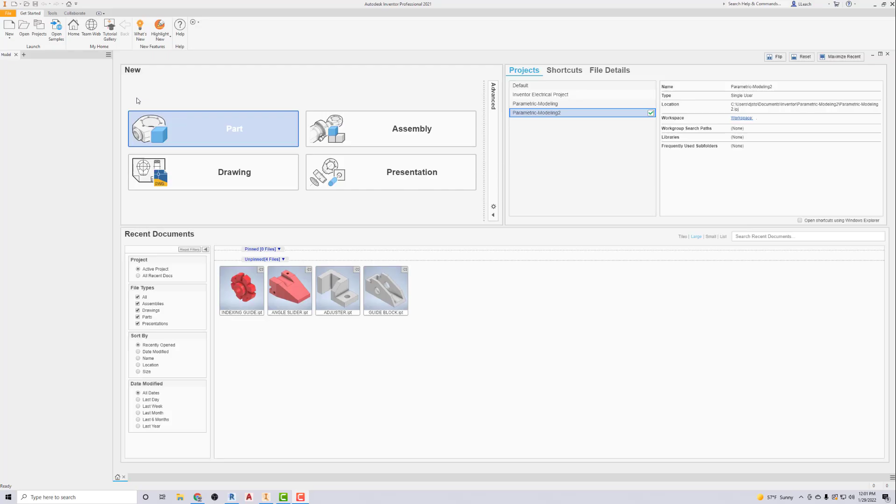Dimensions are in inches, so I'm going to go to new, English standard inches, and then go to create. I'm going to go to start 2D sketch, and click this XY plane.

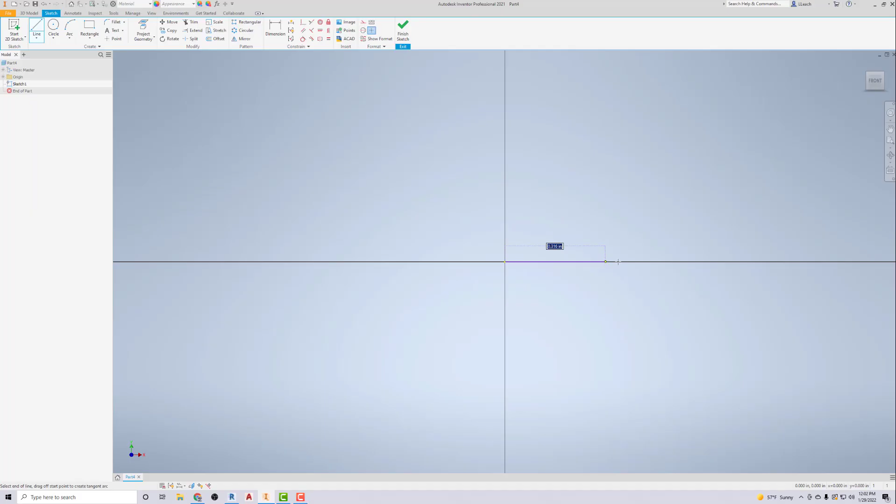So what I'm going to do is create this L shape, kind of the front view of it is a big L shape. I'm going to start here and just kind of draw a random L shape. I'm not worried about the dimensions.

Go up a little bit, make sure it's straight. Go over, straight down. Okay, so now I'm going to dimension it.

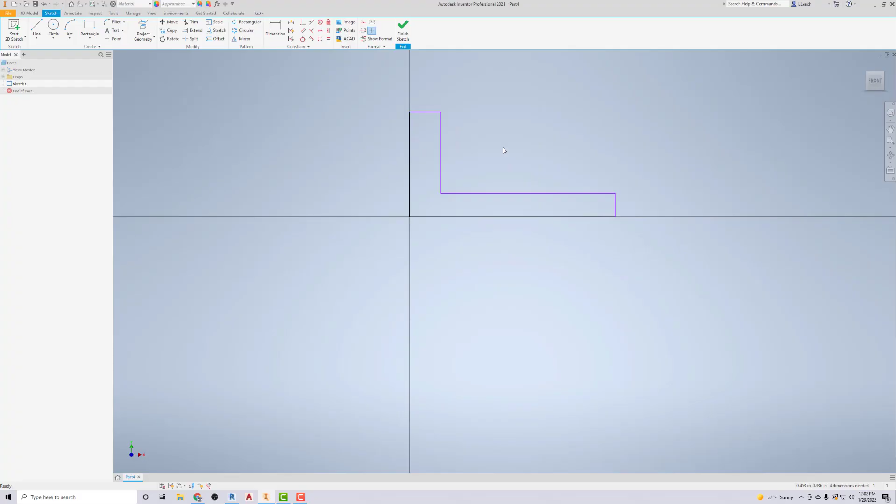This bottom leg here is 4.5. It's gonna stretch me way out. There it goes. So there's that, and then this thing is 2.5 here. And it went kind of wild and crazy.

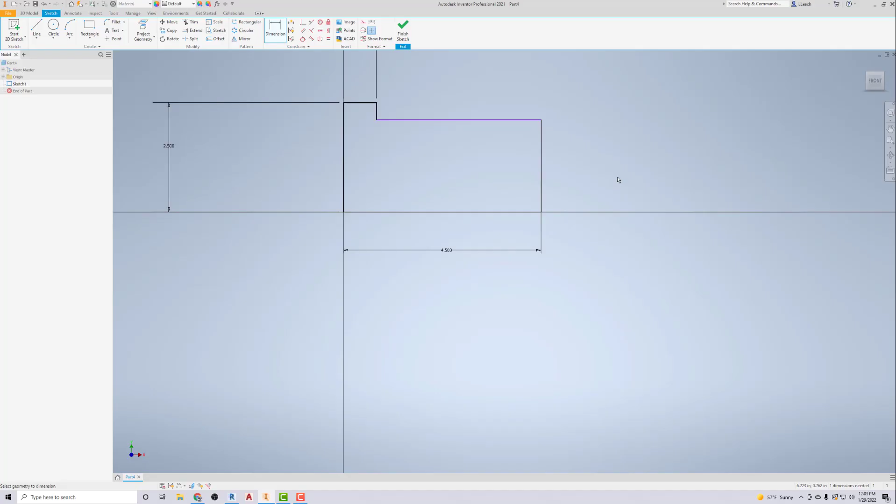All right, so then let's see, this is 0.75. That's 0.75. And then from here to here is 0.75. All right, so there's our L shape.

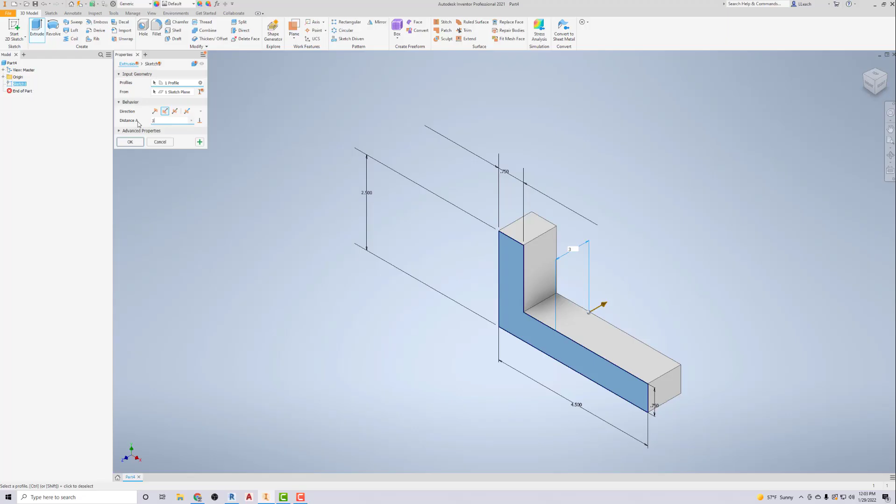I'm gonna finish the sketch. Hit the home button here to get it all in my view. I'm gonna extrude, go back and flip that bad boy. And that's gonna be 3. Hit OK.

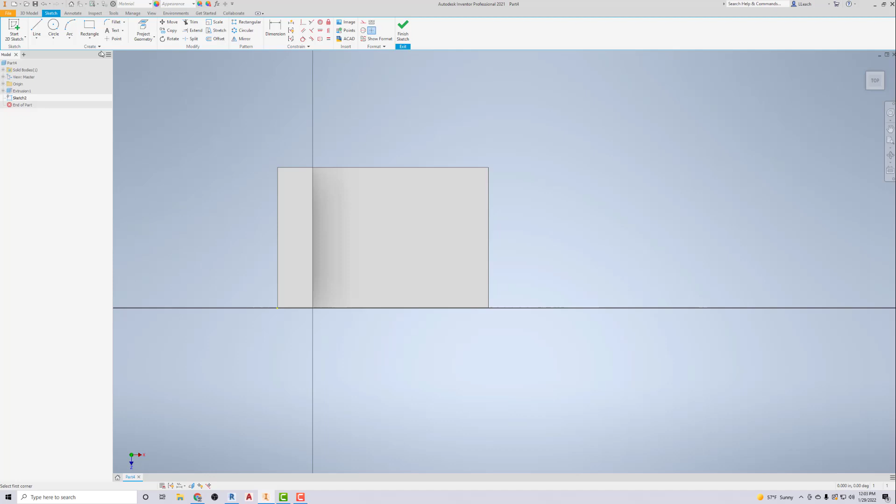All right, so now I've got some choices of which to do next. I think I'm gonna go to my start 2D sketch on this surface here, and create this little rectangular piece. Just kind of go here and throw it way out of the way. It can overhang there.

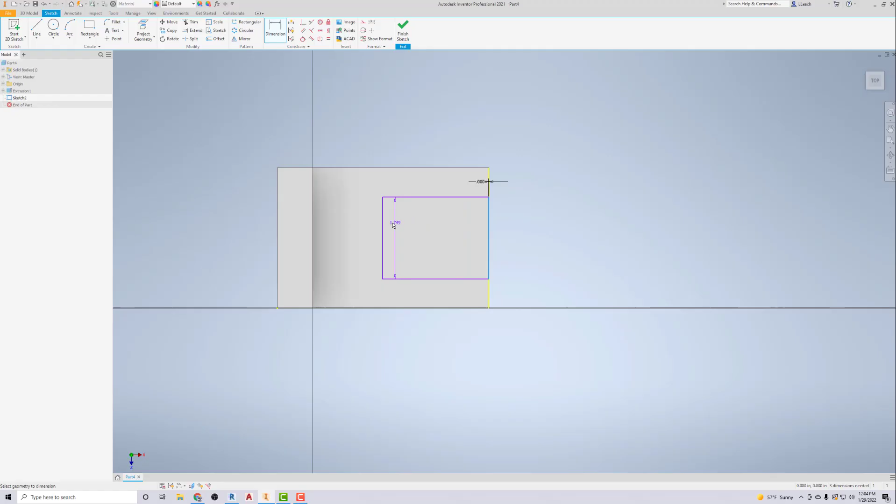So this dimension is, actually, let me do that from here. I really did need that to be there. So I need that to be 0. And then from here to here is 1.5, 1.5.

And then from the sides, this is 2 here. From here to here is 2. And then from here to the bottom edge is 0.5. All right, so there's that. And then if you look down here, it's fully constrained, so I don't need to add any more dimensions to it.

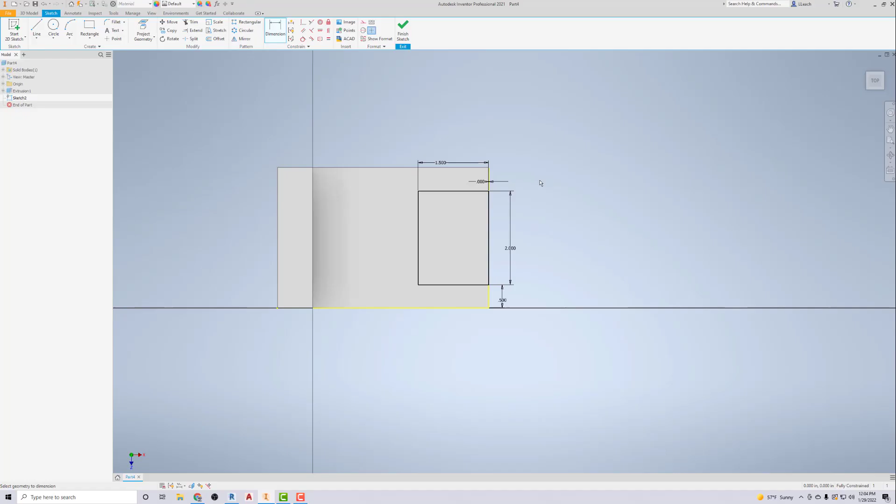I'm gonna go finish sketch. I'm gonna extrude, cut, and all the way through, and then hit OK.

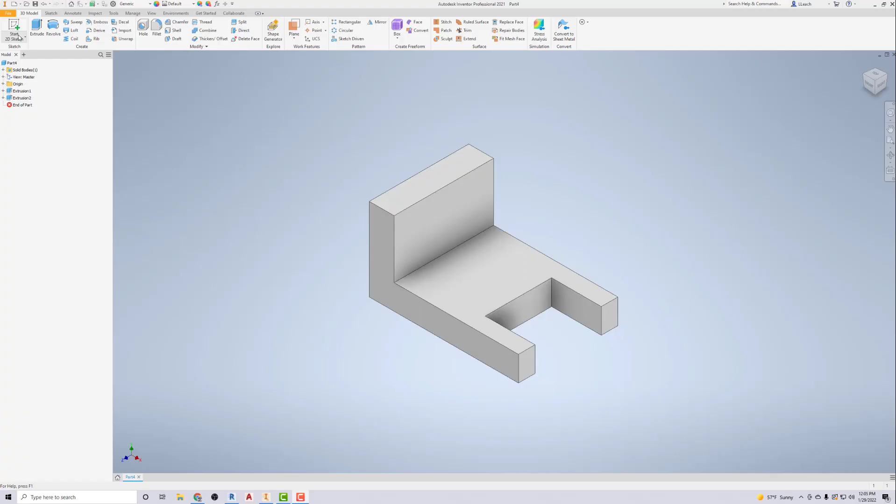And then the next thing I'm gonna do is create the hole feature. So I'm gonna go to 2D sketch, click on this surface here. Let me bring it over in the middle. Click on circle, and then I'm just gonna draw a random circle here.

And so that diameter is 0.75, 0.75. And then the dimension from the center to the bottom looks like 1.5.

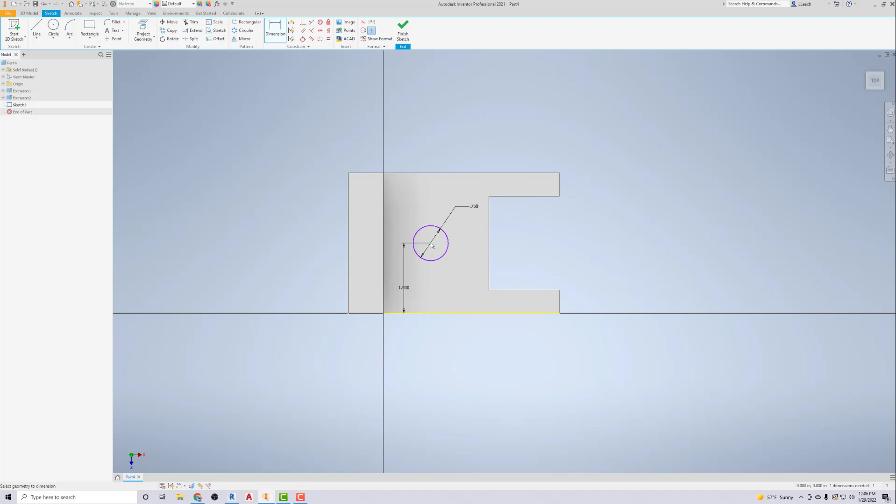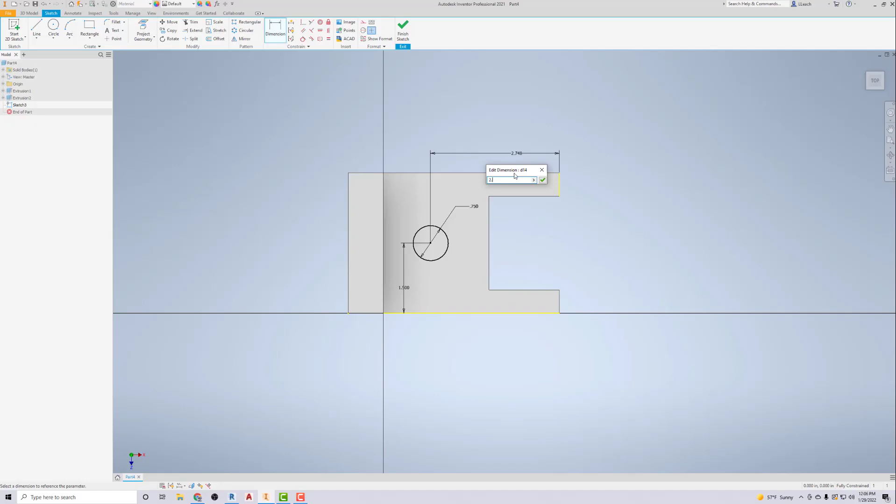And then from the center to this front, or this edge over here, what does that say? Oh my goodness, is that 2? Oh wait, I take that back. That one is going to be, oh, it's 1.5. It's 1.5 there. Oh, 2 point, what is that? I can't read that. 2.57. Let's just go with that. It's 2.57. Yeah, when you're old your eyes like, what is that? Oh, anyway, I'm assuming that's 2.57. That's a weird number, but we'll go with that.

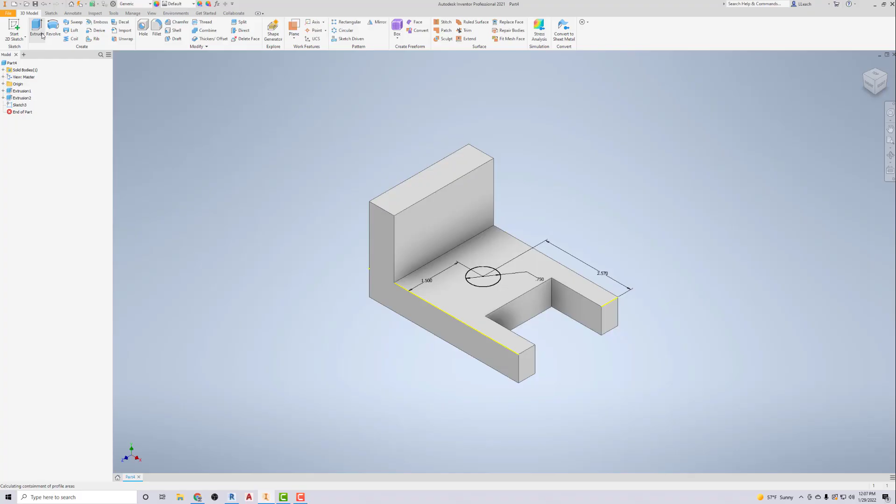Finish sketch, and then we're gonna extrude that hole. We're gonna cut, go all the way through, hit OK. So then all I need to do is just do this little cut here on the side.

So that's one, and that's one. I think what I can do is I can probably cheat here. So if I use the chamfer, my distance is going to be 1. And if I click this edge here, boom, do you see that? Hit apply. There we go. Yeah, there it is. All right.

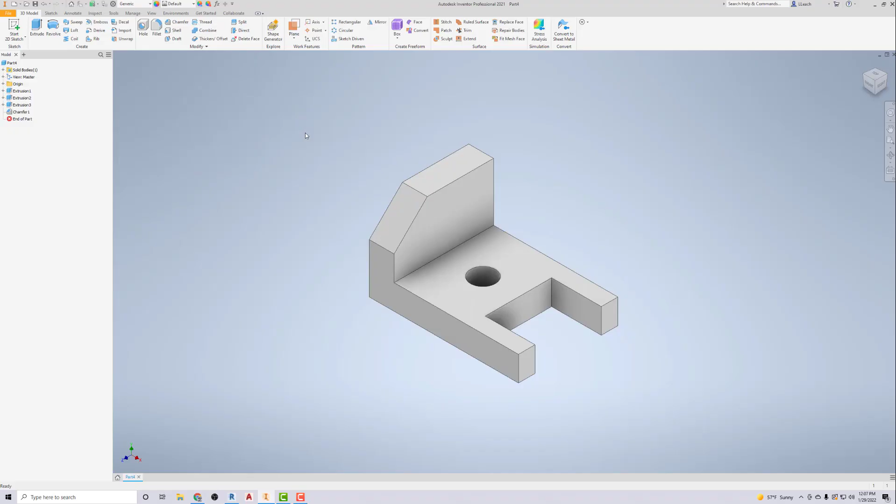And then again, I like changing colors. Light red. Bam. Okay, so yeah, that's that part.

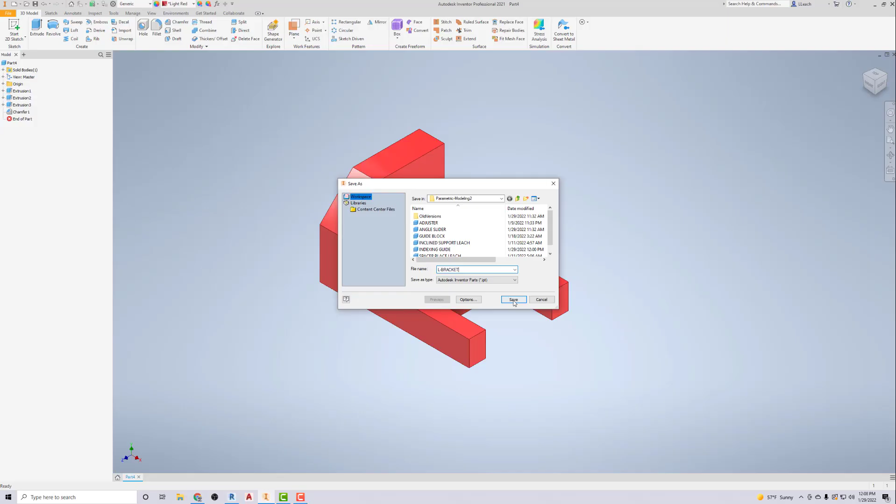I'm gonna go to File, go to Save, go to Name. I'm gonna name this L Bracket. Wait, I like capital letters. L, come on now, capitals. L Bracket. There, save it. There it is. All right, it's even got some shiny stuff over here. I like it. All right, there we go.